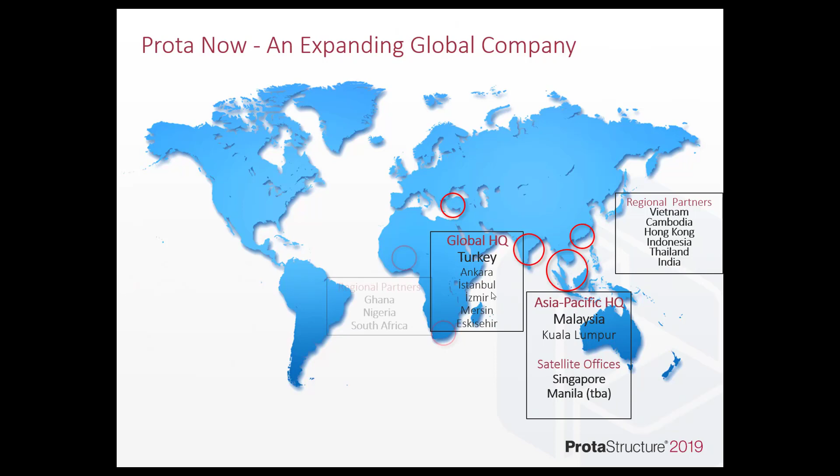In this region, we have regional partners in Vietnam, Cambodia, Hong Kong, Indonesia, Thailand, and India. We also have regional partners in Ghana, Nigeria, and South Africa. Our Europe office is located in Warsaw, Poland, and we have regional partners in Romania, Bulgaria, and Croatia. Finally, we have regional partners in Brazil and satellite offices in Russia and Middle East.

Well, today we'll cover some of the great features of ProtaDetails, namely detailed drawing generation of ProtaStructure models, retaining wall design and detailing, pile design and detailing, engineering utilities, parametric rebar generation, and we'll talk about the advantages of ProtaDetails. Okay, let's see it in action.

Well, we'll talk about ProtaDetails, but what is ProtaDetails? Well, ProtaDetails is not just one thing actually. It's more like a combination of engineering and detailing tools developed on top of a CAD infrastructure. So first, it's actually a CAD software in the core, but it also allows you to create and organize all structural concrete detail drawings in one go. Still, the definition would not be complete as it is equipped with design and detailing macros along with an intelligent parametric rebar generation system. We will go over these features as much as possible in this webinar.

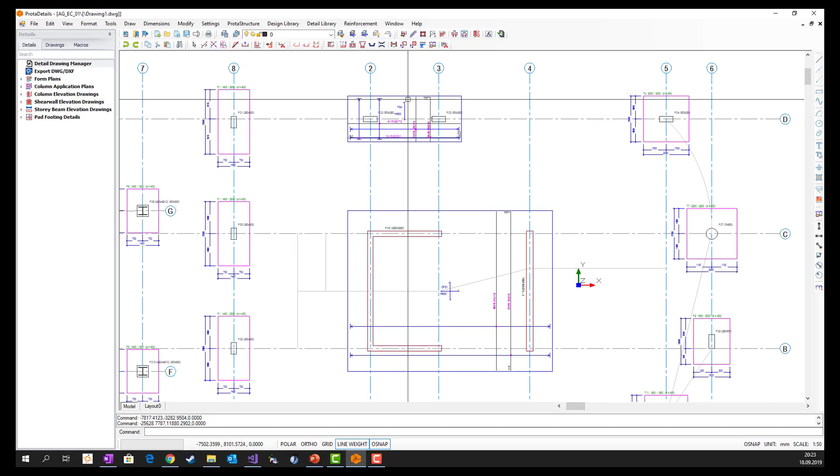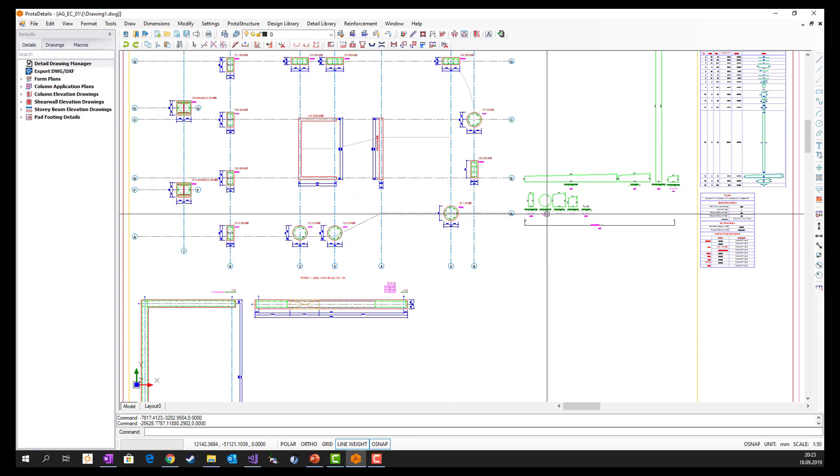Let's take a closer look at what we have produced. I have my foundation story key plans, my first story. They are all generated very neatly on my sheet. I have the column applications. I have shear wall elevations. I have column and shear wall schedules.

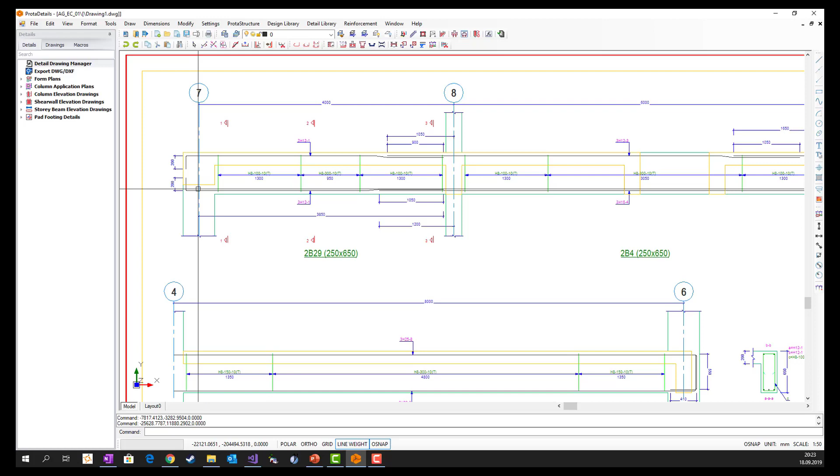I have my beam elevations. See, there is no clashing at all. It's a very clean drawing. And I have my footing details. Well, let's see what we can do more with our drawings.

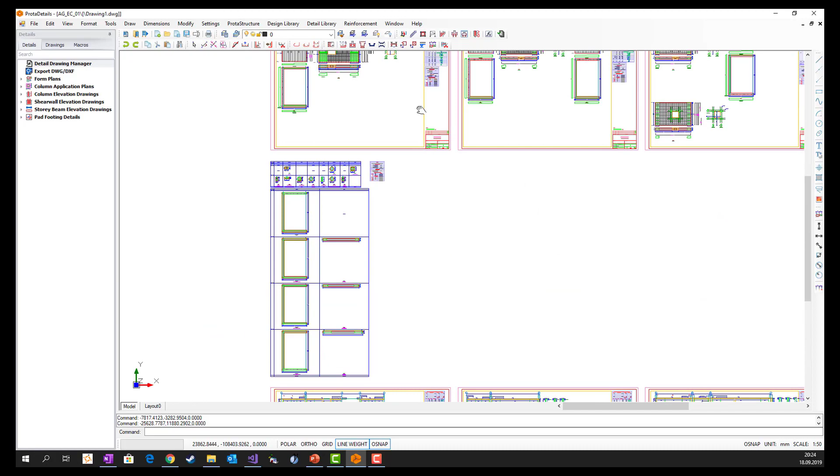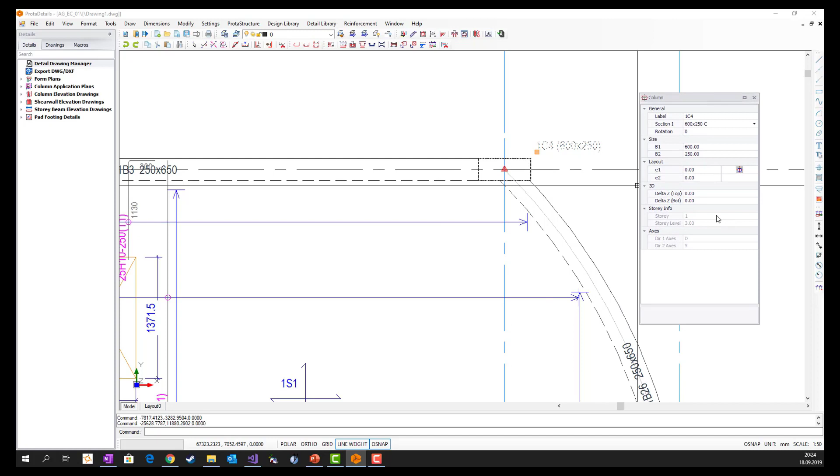As I told you, these are intelligent drawings. So what do we mean by this? It means that if I select a column, it knows that it's a column and it behaves accordingly. I mean, you can change its properties with the property window. You can change its sections, its eccentricities, etc. And it applies for all the members in this drawing, like beams and slabs and even rebars. Actually, rebars are the most powerful part of the software.

Well, I would like to do more with my drawings, of course. For example, I can cut a section along my form plan. For this purpose, I can go to Detail Library. I will go there and select Plan Section, and I will just pick 2 points on the screen. I will use Ortho Mode, and my floor section is ready.

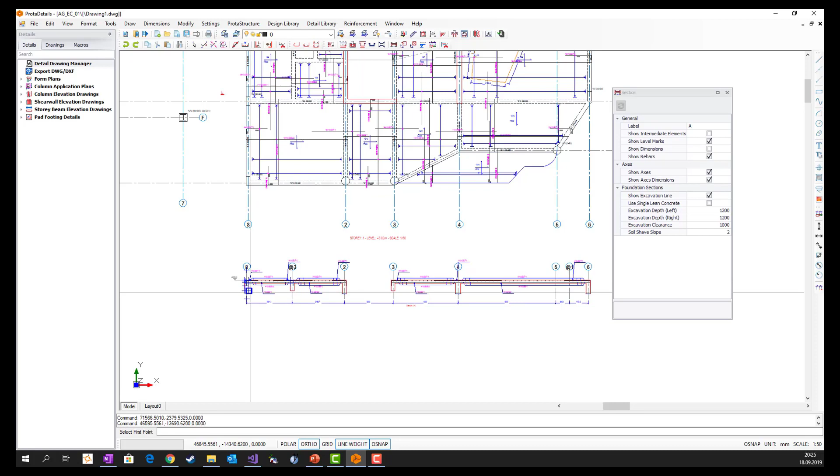I can change how it looks. It's ready with slab rebar sections. But as I said before, this is a CAD environment. That means that you can draw primitive CAD entities like lines, and it also supports command line. So I can draw lines, I can close them, snap. I can select all my snap options, and I can do a lot more with my primitive objects here.

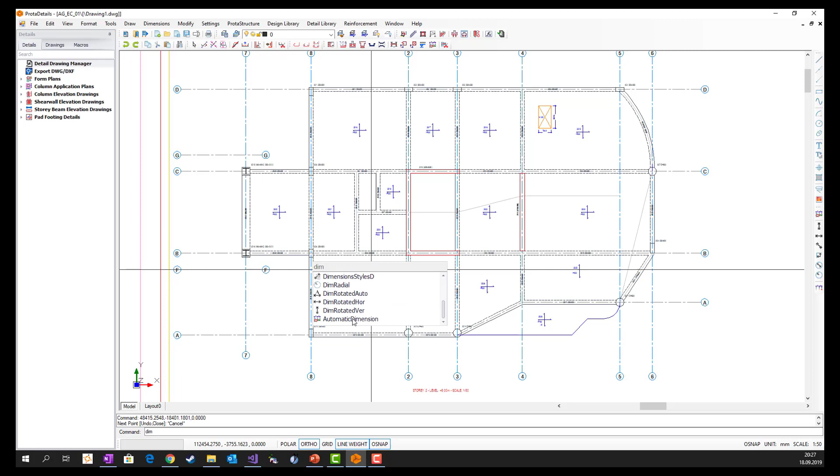Now let's go to the other story, and maybe you would like to dimension your form plans. Of course, you can do it with the standard dimension commands. They are all provided, but if you would like to make it faster, then you can use the automatic dimension. I just select the command and pick 2 points, just like I did with the form plan section. I don't want axis. This is an inner dimension, so I don't want any total dimensions. And yeah, that's about it. I will click OK, and my inner dimensions are ready.

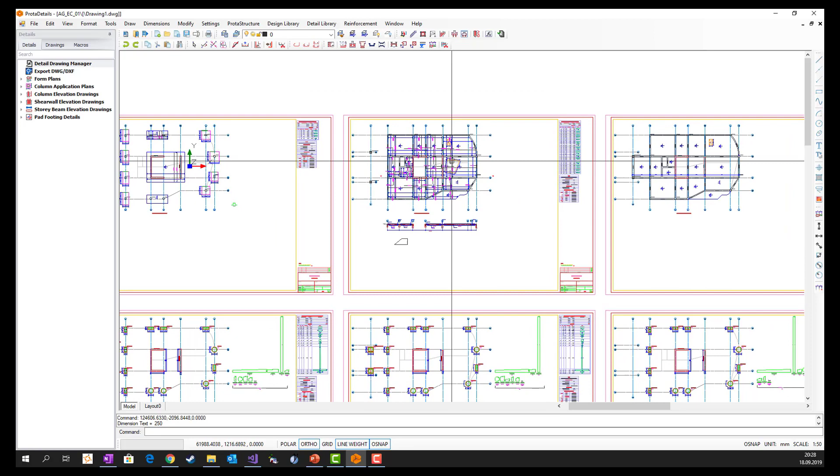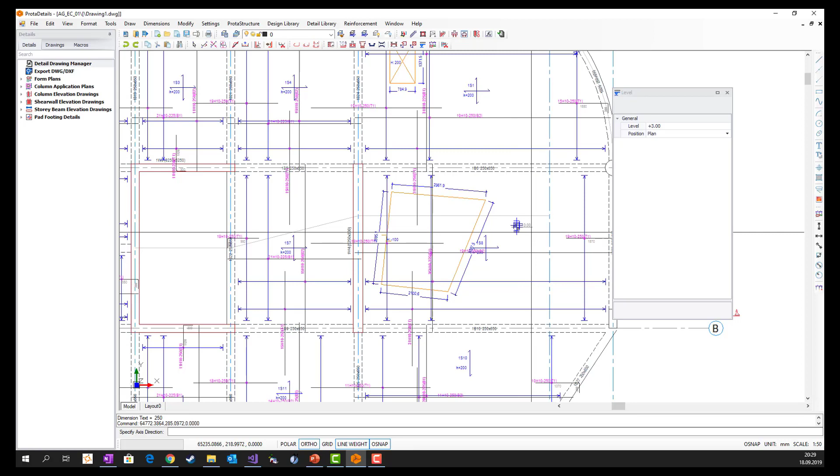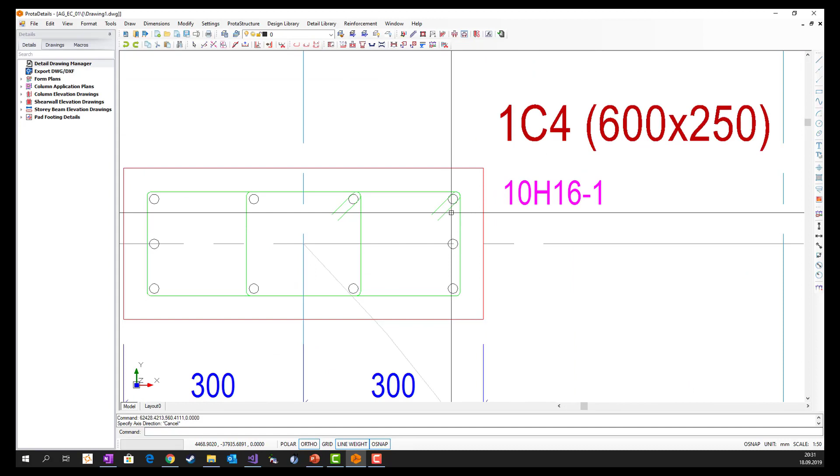So let's continue with column elevations and shear wall elevations. As I said, this is an intelligent drawing, so our rebars are intelligent as well. So when I click a rebar, I can change any parameters of a rebar here.

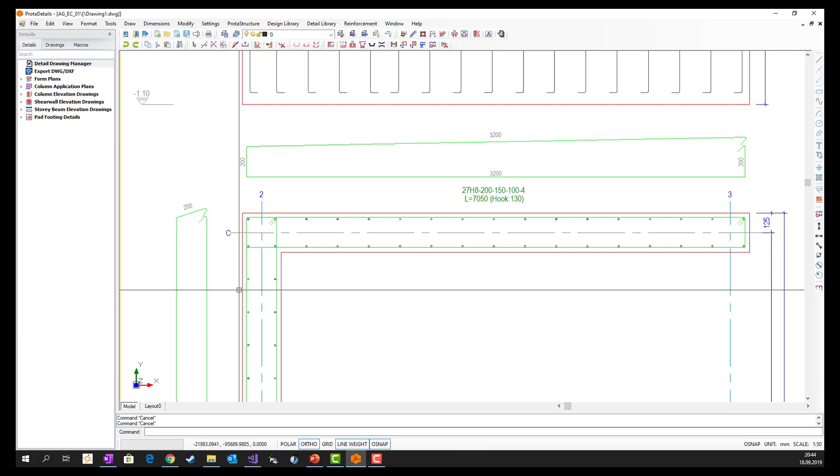I would like to go over the shear wall and column elevations. The level of detail has been enhanced significantly in column and shear wall elevations. Core wall details are generated with high precision, so you don't need to edit them manually. And this will save you a lot of time. Shear wall holes are displayed in elevations, sections, and schedules, along with the required rebars. So you don't need to worry about the code compliant hole detailing because it's all done automatically by ProtaDetails.

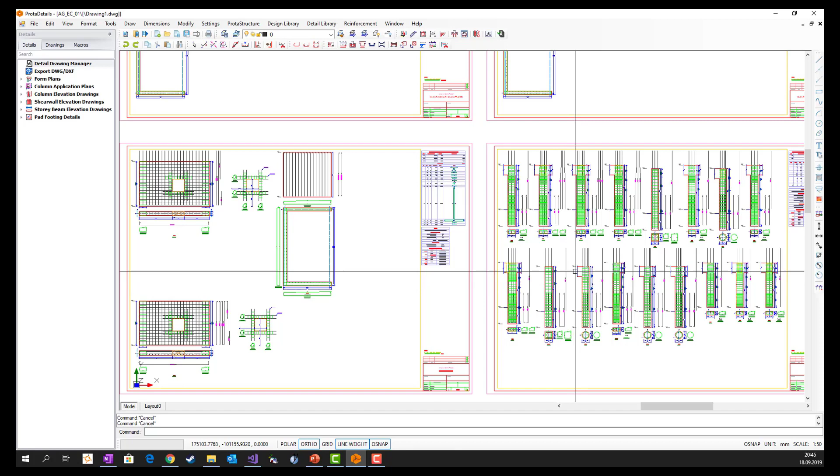Let's switch to column elevations. Well, in column elevations, longitudinal bars can be lapped in the mid-span of the column with this version. I have not preferred it in this project, but you can create mid-span lapped rebars in the columns. Slanting columns can be detailed precisely. Beams connected to columns from other directions can be displayed on the elevation as well.

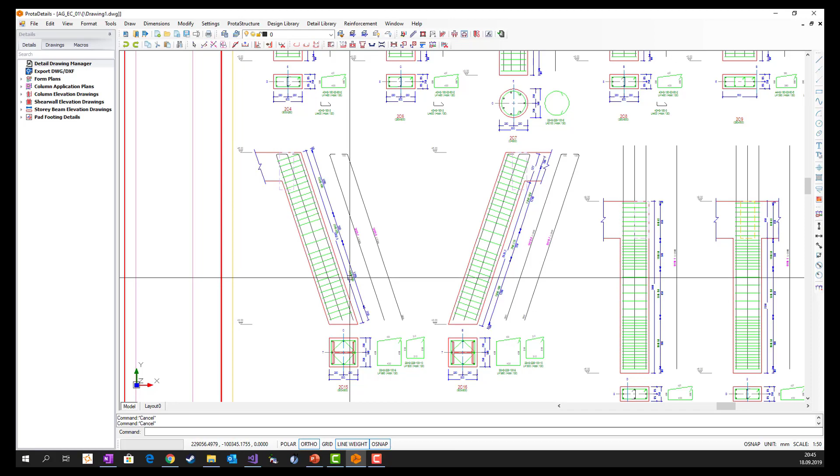But we know that the elevation story by story is not always enough. So it is usually better to see how the column is detailed through the stories. How are the rebars doing while the column section changes? You can prepare your column elevations through stories. Let's select this one, and I just right click and draw column elevation through stories. I want them to be drawn through all stories. So I see that the dimension is changing and my column elevation detail has been prepared according to the code provisions for the changing dimensions.

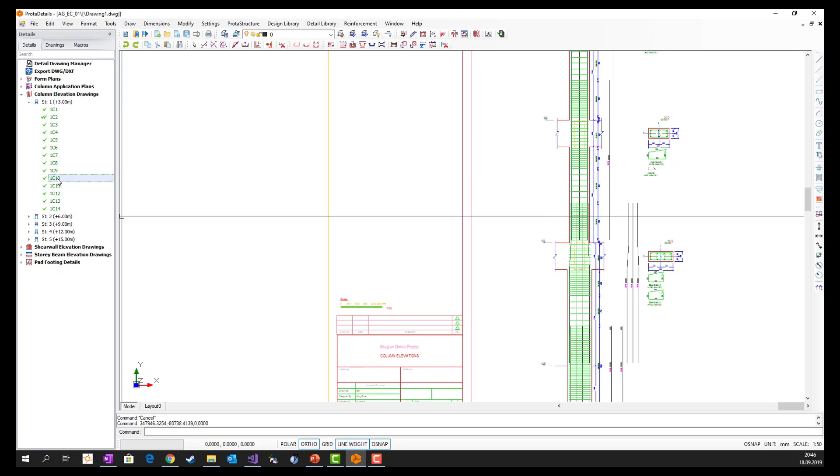Or maybe I have the slanting columns here. I would like to show them through stories as well. And you can see that they are detailed precisely.

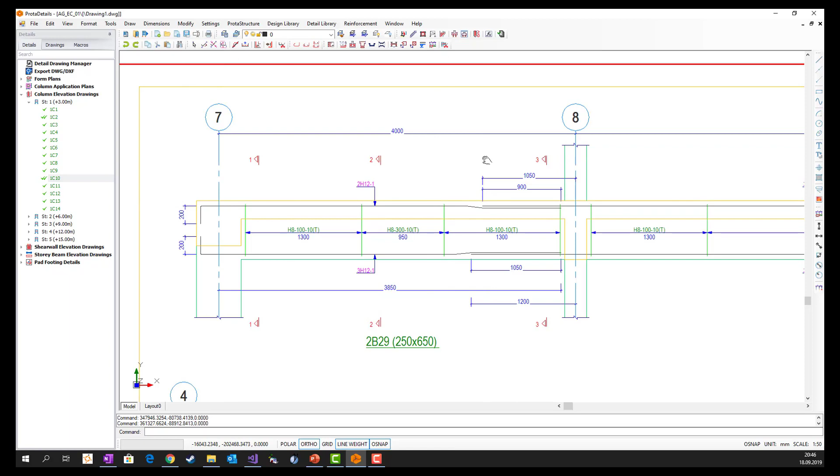Now let's see what we have produced as beam elevations. I prefer to truncate my beam elevations from the closest axis, so they look very neat inside the sheet. I could have truncated them from the sheet border as well. You see, this is a very clean, detailed drawing. And I would like to show another feature here, which is the intelligent rebar update. For each sheet, we create the quantity takeoff. And let's see, for this one, the amount is this much.

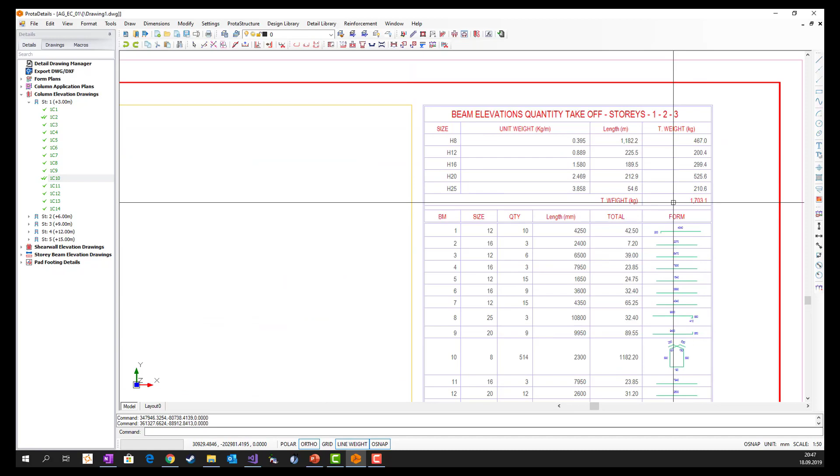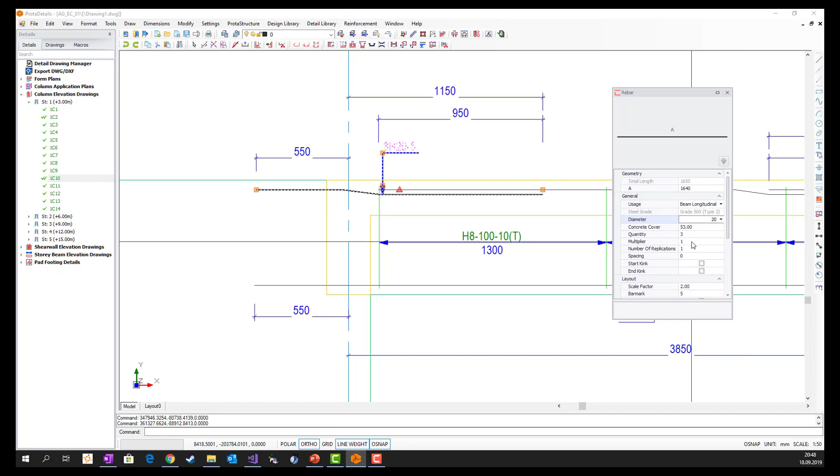But what if I had to revise my project and I had to change some of the rebars in some beams? Let's say, for example, this one. Let's say this rebar had to change the mesh diameter from 12 to 20. I have already created all my detailed drawings and still I had to do the revision, but I have a very minor revision. I don't want to draw all the drawings again. They're all ready. So I just come here and use the intelligent rebar property, and I see that the quantity table updated automatically and dynamically. Can you imagine how much time this will save you?

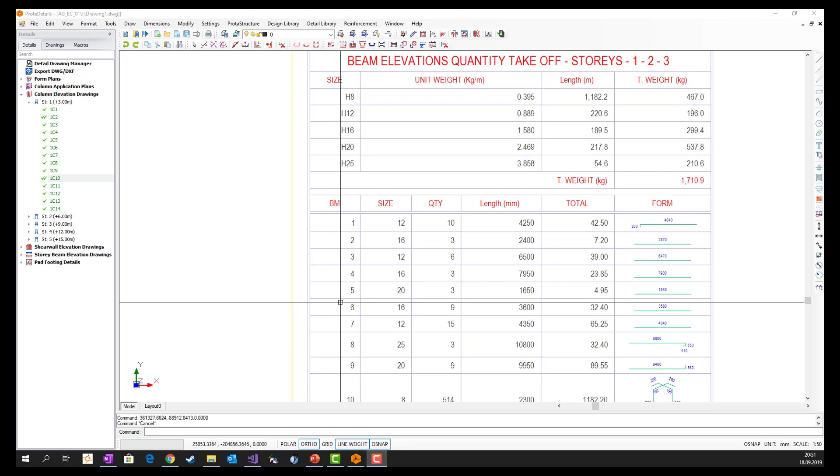Well, there are like 100 more functionalities about automated detail drawings, but I have to leave it here for now. And I will open a new drawing inside this project. ProtaDetails is an MDI application, so you can create as many drawings as you want, and you can save all of them along with your project. So I opened a clear page.

As I told before, ProtaDetails can do much more than just creating the detailed drawings of a building model. We know that you are not always dealing with buildings, but other types of structural components as well. We want to make your life easier. So we have a design and a detail library for that purpose. And we are continuously adding on top of them and enhancing the quality and the quantity of these libraries. I would like to cover a few examples here.

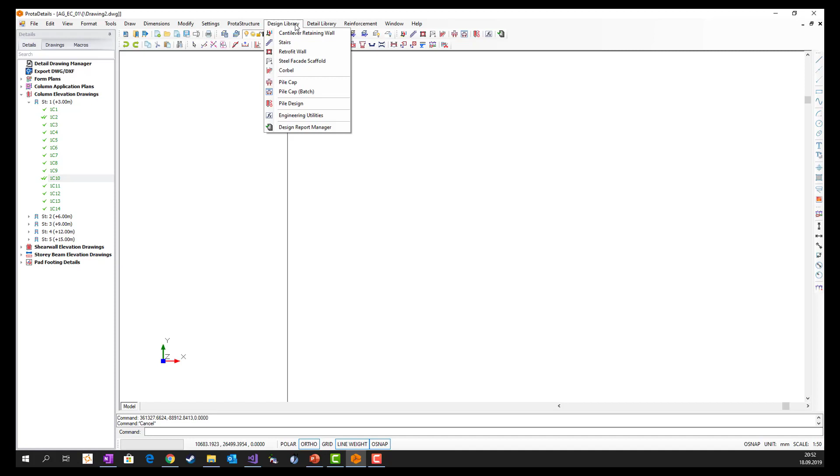I'm going to start with the cantilever retaining wall macro. We have made a lot of enhancements on our retaining wall macro with this version. I can confidently say that this is one of the most comprehensive solutions for retaining wall design and detailing in the market. You can load combinations, ultimate limit states, and partial safety factors. Detailing requirements are taken into consideration automatically here.

Let's say I have a shelf, maybe. When I click on the shelf button, I can see a guideline here for an economical design for the shelf. I can enter the parameters, soil parameters, front, back and ground soils. Well, this is a very cool feature. I can change the number of top rebar layers at the base plate, so I can have a more economical design.

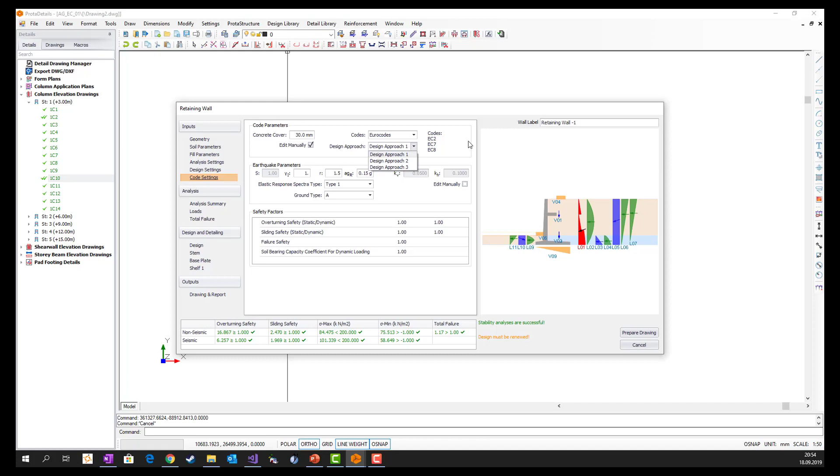I can design my retaining wall according to Eurocodes or the American codes. And as you know, Eurocodes offer a lot of different design approaches, and all of them are supported here. And the analysis is very transparent. So we show all the intermediate steps to you, so you can dig in further. The calculated loads are automatically generated, and you can see them on the right-hand side screen.

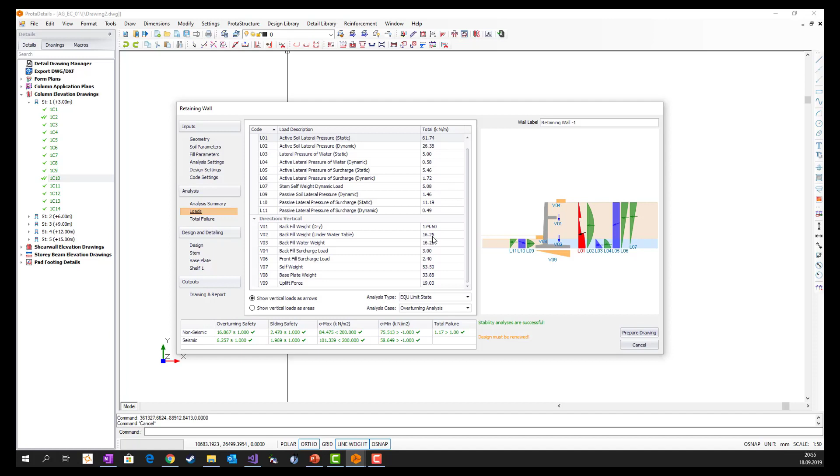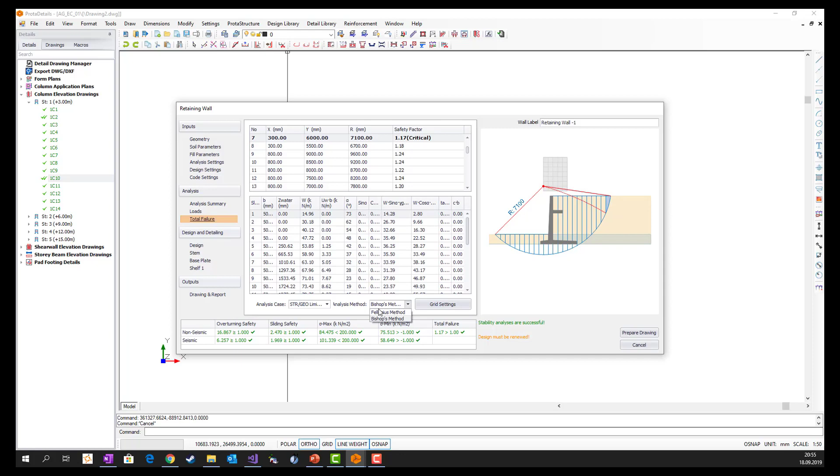I can investigate the geotechnical limit states, the equilibrium limit states, etc. for all types of analysis. And for overall failure, there are two different methods in the literature, namely Bishop's method and Fellenius method. Both are provided. So when I switch to the design part, my rebars are automatically selected here as well.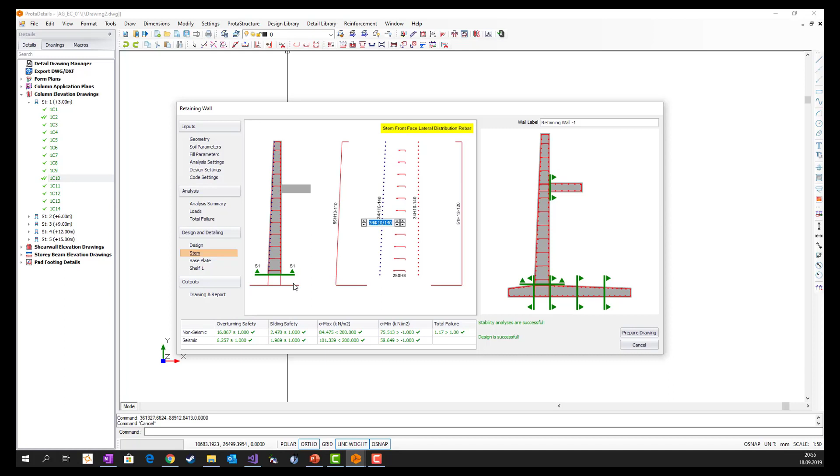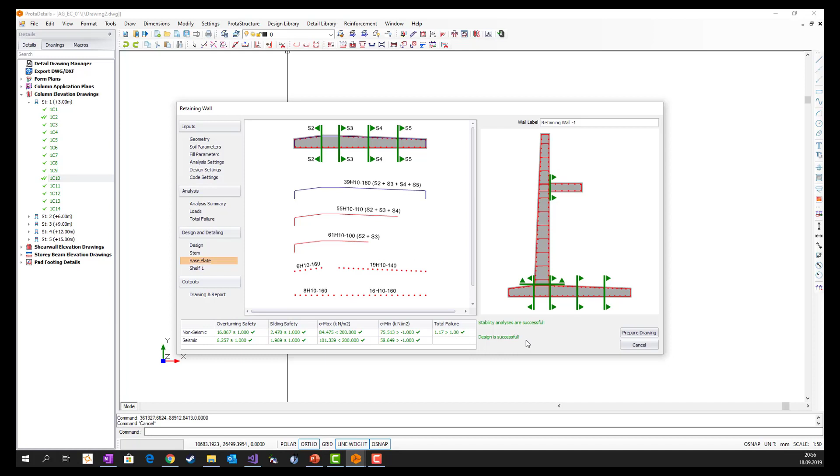I can see the detailed analysis of the sections, and I actually have a visual design aid here. So just like we do in our beam design module, I can come here and change the rebar diameters and other properties of the rebars. And the design is based on the most critical sections. As in the beginning, I have selected 3 different rebar layers for the top rebar of the base plate. So I can select them here and change. As long as I have the green design is successful text here, I am done.

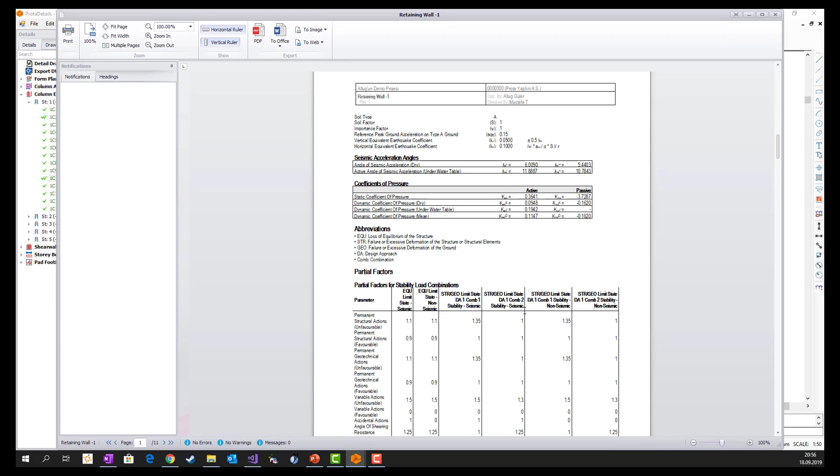What's left is I can create the reports for this retaining wall design. So when I create this report, it's a visually satisfying, very neat and clean report. And when I created this report, it's added at the back of this ProtaStructure model. So I will click Prepare Drawing and show an insertion point on the screen, and my detail is ready.

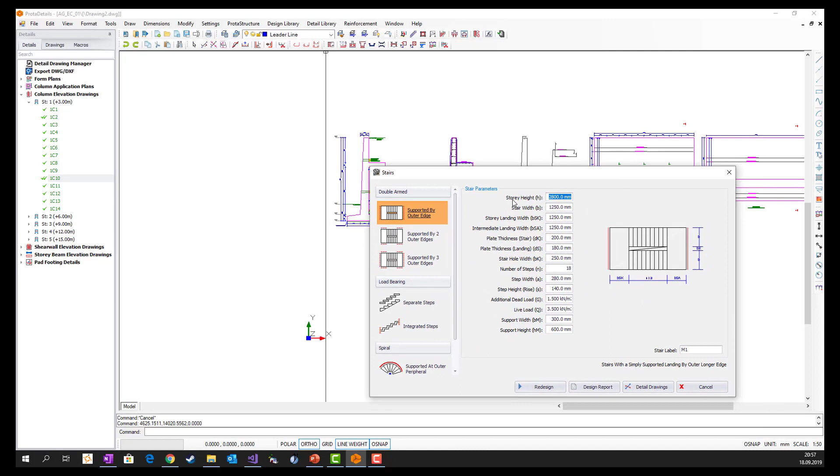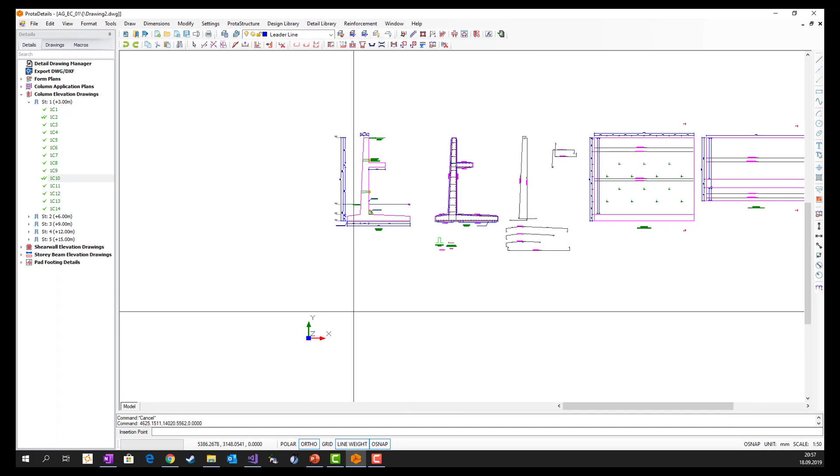Let's continue with another design macro. In my model, I could have stairs modeled in my structure, but if I want to detail them and design them, I can use this macro. I will just go with the default parameters. My design and rebar calculation results are shown. I can edit them. And again, I can create the design report, and it's done. Then I will just pick a point on the screen to create the details. It's complete with the quantity takeoff.

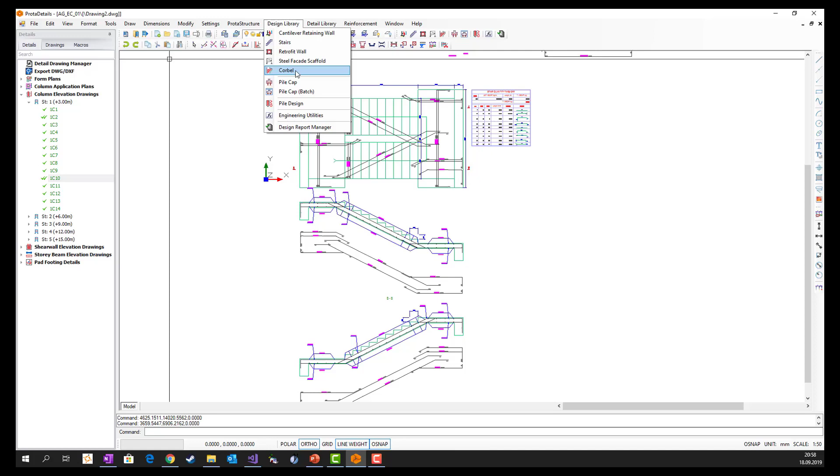I have retrofit wall macro, steel facade scaffold macro, and corbel macro. You can design your corbels using this. Maybe I have a double cantilever corbel with tapered shape. I enter my loads, and okay, I'll go with the Eurocodes, and I will just say draw. The design is successful already, so I will just say draw and pick a point again.

What else do we have? We have the pile cap macro. The pile cap macro is the same one that you use in ProtaStructure.

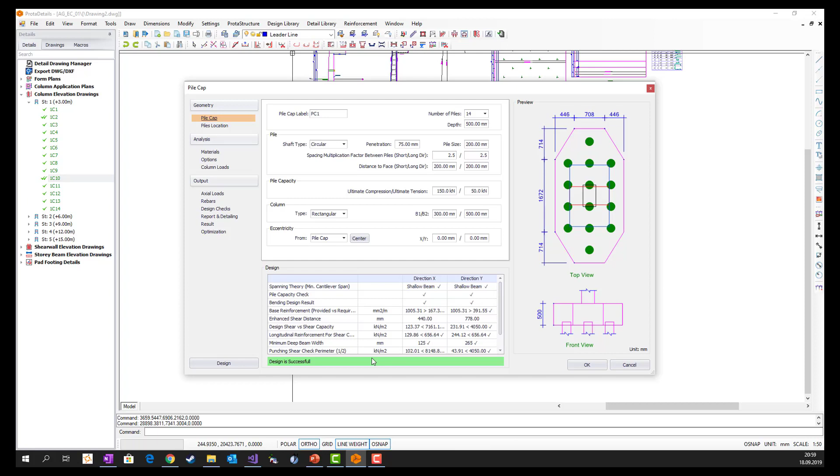I can change the number of piles, and I'm always updated, and I can follow my design status here. As long as it's green, it's successful, I'm all clear to complete my design. I can enter my column loads, change my column loads here. I can select or override my rebars, and I can even optimize my design. When I'm done, I click OK and pick another insertion point.

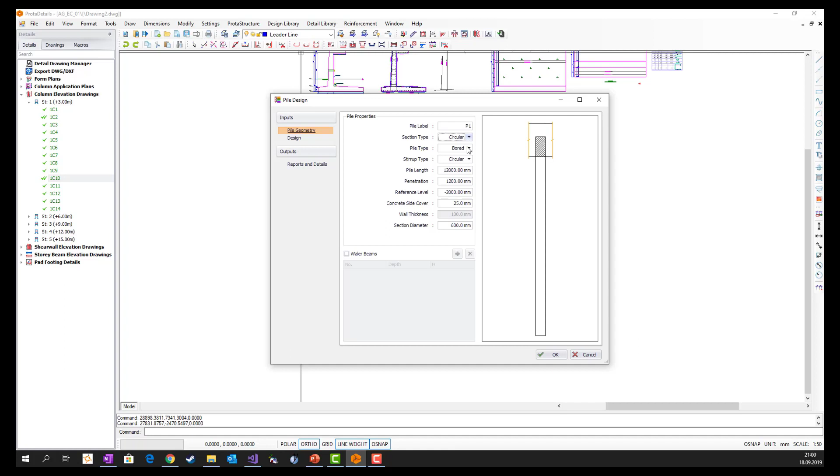The next macro I would like to cover is pile design. It's a very useful macro. You can design individual piles with different section types or pile types, bored and pre-stressed spun, and maybe you have some Waler beams over here.

When I switch to the design tab, actually I don't need to design this pile, I just go with the detailing part of it. If I say OK and show the insertion point on the screen, it's just about detailing. But if I want to design it, I can design it to working load or lateral analysis.

When I click working load, I have more tabs opened up. I provide the axial force value. When I switch to soil profile, I enter the soil profile that I got from the geotechnical report. I can change the soil materials here, define new soil materials, and use them.

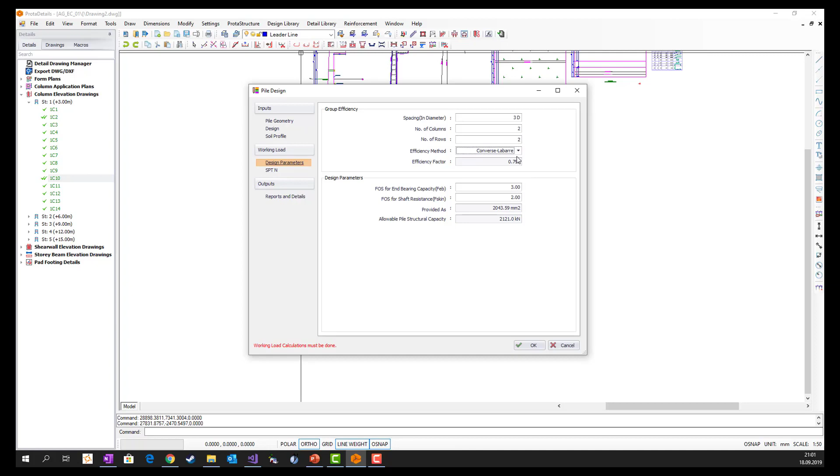And there is of course the efficiency method. You can select from 3 of the efficiency methods in the literature. Provide the standard penetration test results here, and maybe I have some negative skin frictions, and I just say calculate working loads. When I click the button, the diagrams come up and my working load is calculated.

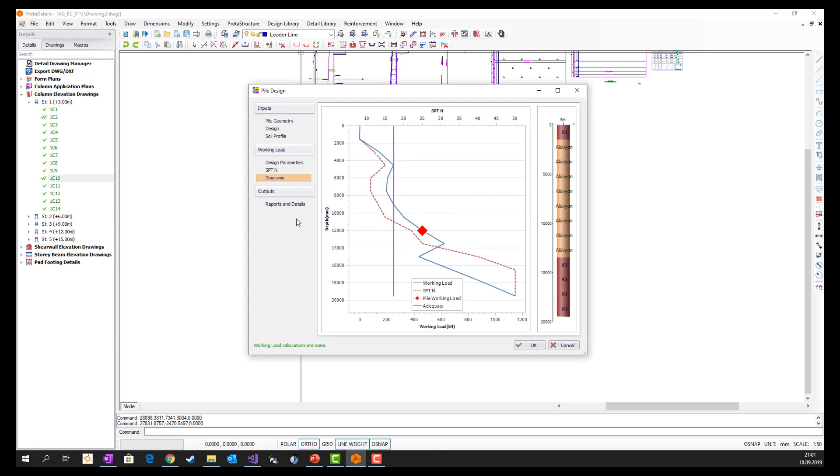But what if I want to perform a lateral analysis as well? I click this and I have to provide more information now, like shear forces and moments in both directions. And I have another window here - this time I have to provide a soil model as well.

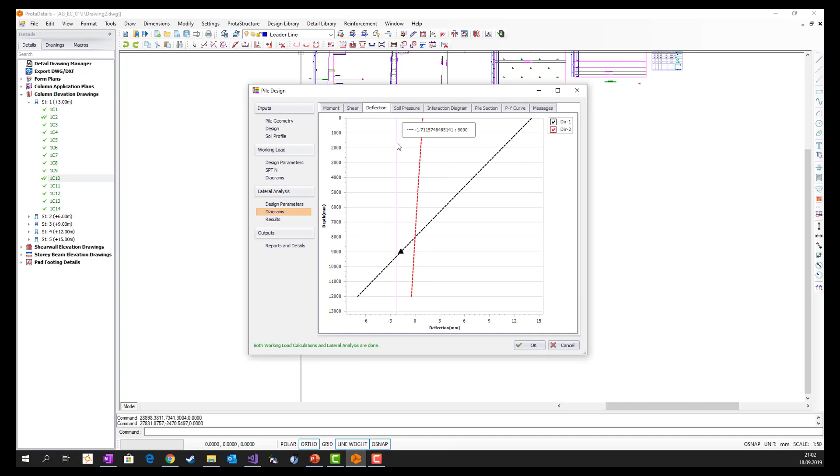I select from the existing soil models and use the recommended values, then click design pile section, and my design is ready - the diagrams are generated. I can inspect the moment, shear, deflection, soil pressures, interaction diagram, and so on, and check the results here. Again, I can create my report, and when I'm done, I just click OK and pick an insertion point on the screen.

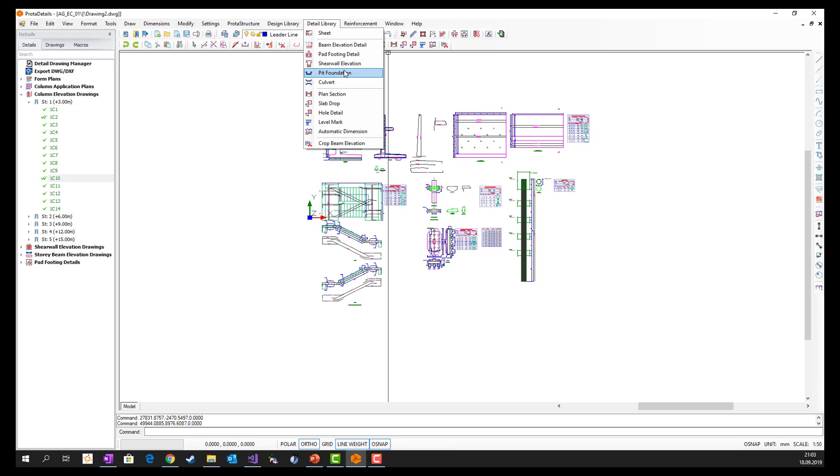The difference between design libraries and detail libraries is that under design libraries we provide both design and detailing of components, but under the detail libraries you can find components that you can only detail. Under detail library we have pad footing details as an individual component detailing.

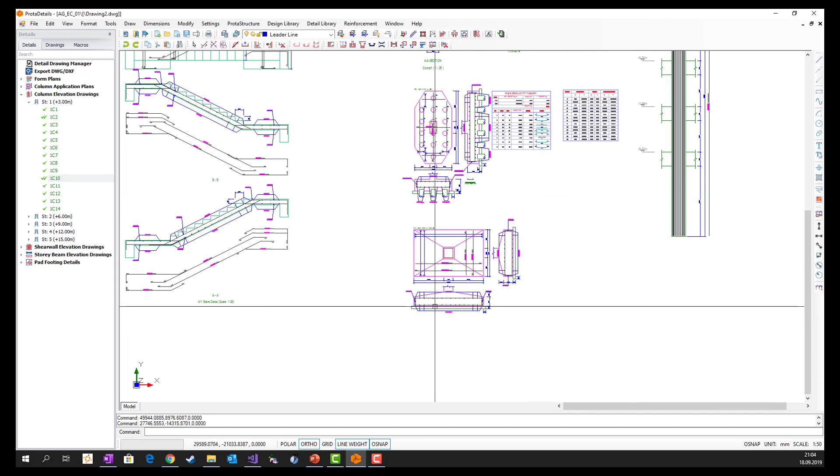I can detail my pad footing. I can select from different rebar detailing options here, and I just click OK, and again my drawing detail is ready with more rebar placement options here.

And what else do we have? We have the pit foundation detail library here. I can use this one - I provide all the values and just click OK.

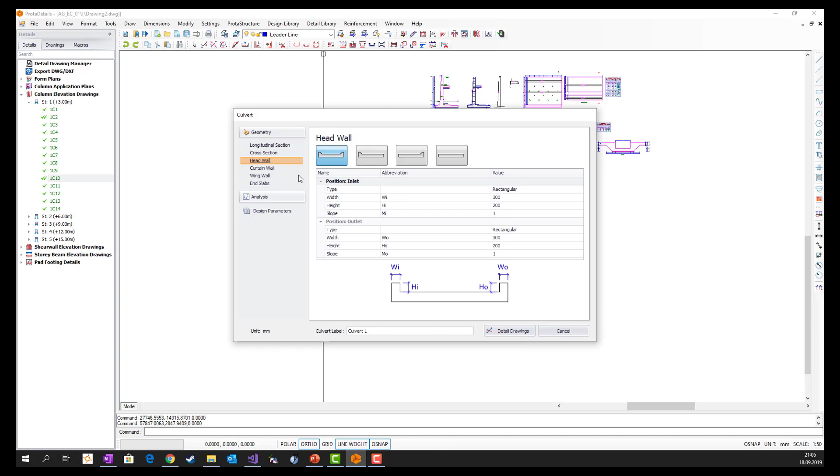We have a very comprehensive culvert macro. You can provide the longitudinal and cross sections with very flexible options here. You can change your head wall style, curtain wall style, wing wall type, and play with your end slabs, and when you're done you can just click and generate the detail drawings.

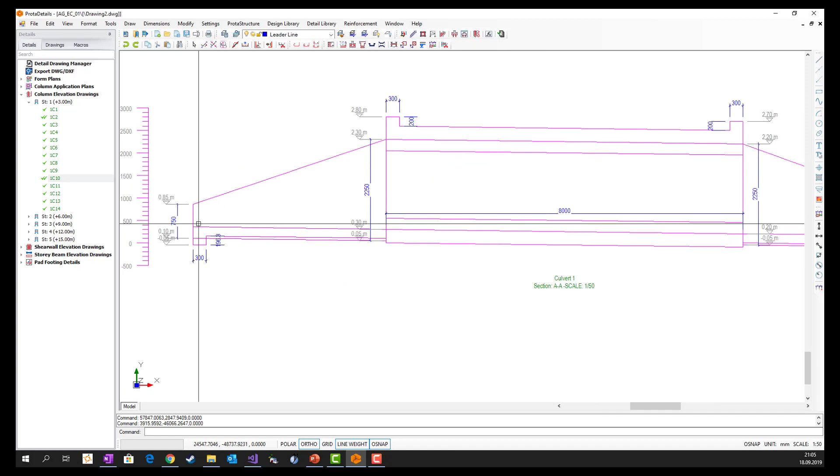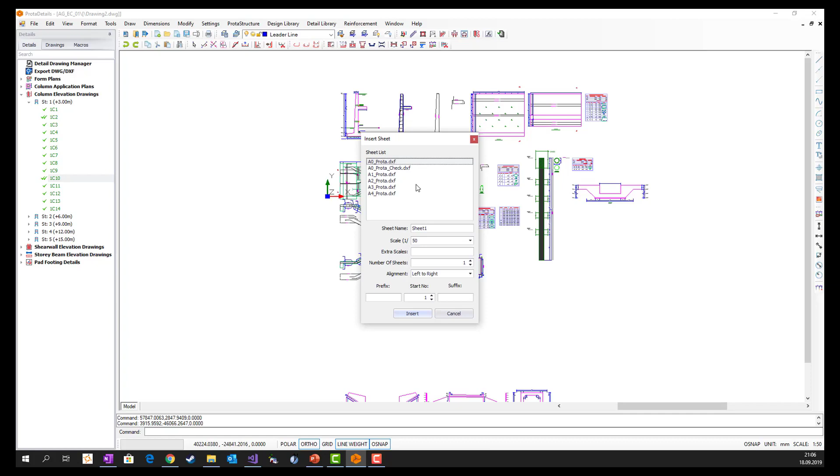My longitudinal sections and cross sections are already here. I have created many detailed drawings, but they are lying all around the arena. I just type sheets, and you can select your sheets among your company standard sheets that you have created. I will just click OK, insert, and let's insert it first here.

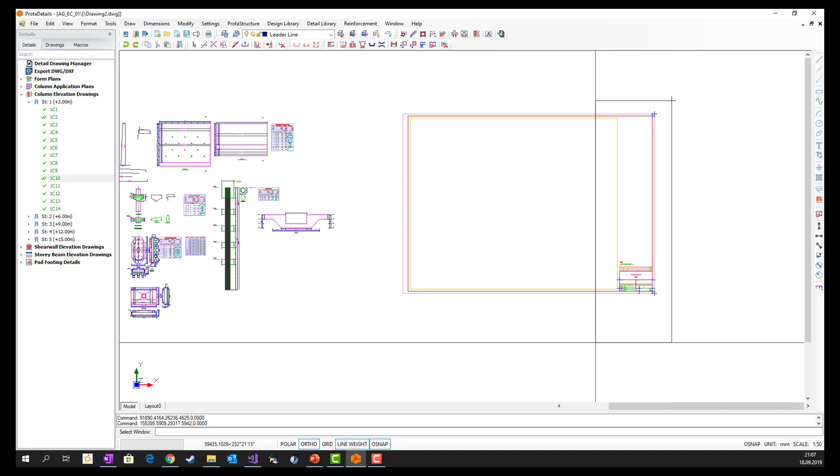This sheet won't be long enough for this many details, so I would like to stretch them a little bit. As I said, this is a CAD arena, so I will just type S, and the stretch command appears from the command suggestion. I select it and stretch my sheet just like that. I think this is better now - that's enough. And I can, of course, move my sheet.

If I make some more arrangements, it will look better. As you see, I can play with my detailed drawings just like I would in any other CAD software. I have created all these details, but what if I would like to quantify them together? They have individual quantity takeoffs, but let's say I want to produce them all together and have a single quantity takeoff.

I will use the most powerful feature of ProtaDetails for this purpose: the quantity takeoff. I will just type the quantity table and OK. By the way, all these commands are ready and available from the menu as well, but I just prefer to use the command line. I select the arena and click enter.

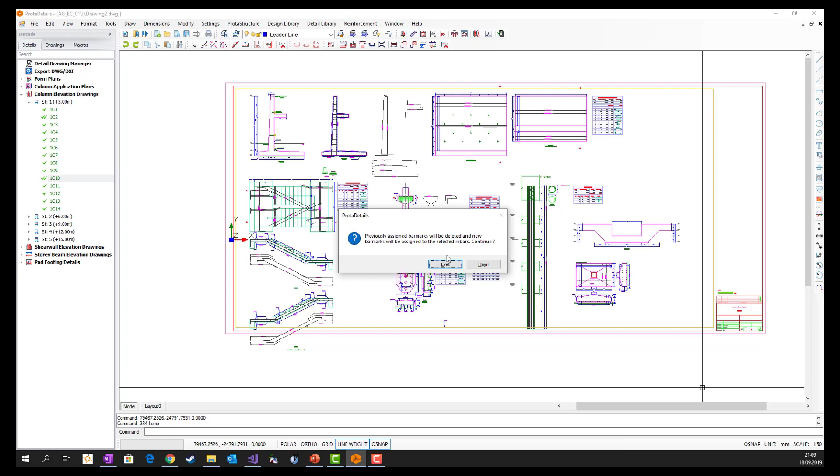Yes, I would like to create a new quantity table, and let's create it over here. You see all my rebars are now assigned with new bar marks, and all these bar marks are listed in this new quantity table.

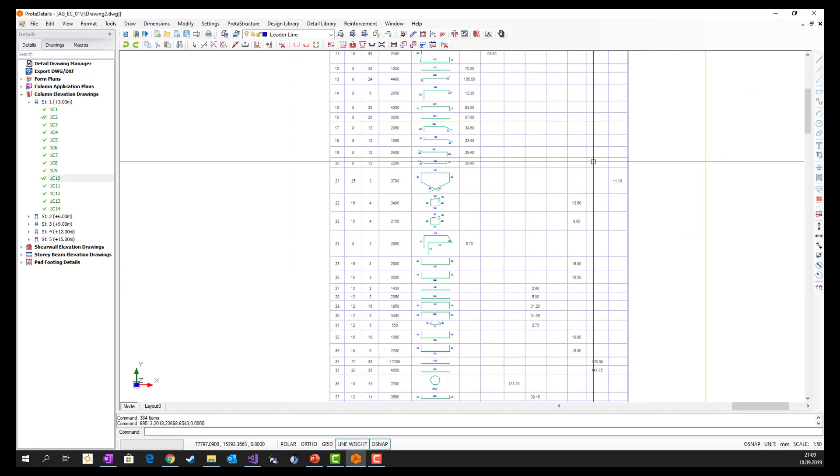So I can see the final result of this sheet's total sum. By the way, as I told, this is your sheet actually. But what if you would like to change some information on your sheet? These are parametric sheets, and you don't have to stick with what you entered at the beginning of your project. Maybe you want to change some of the features or information fields here. It's very easy to do.

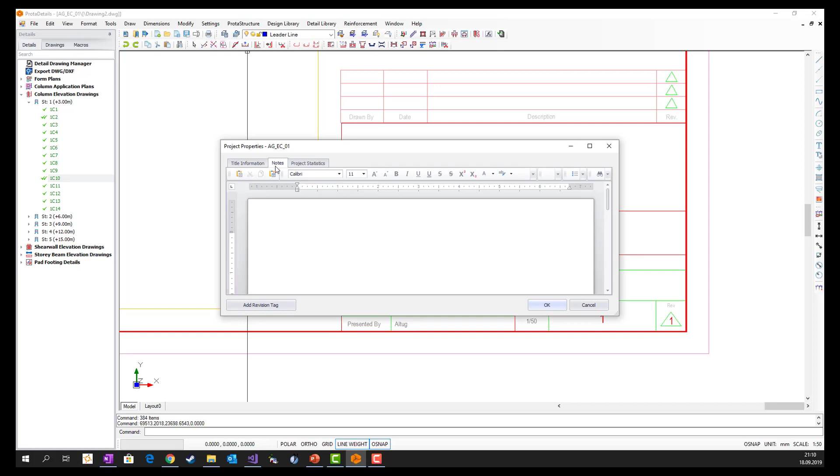I just go over to the ProtaStructure menu and click project header, and change, let's say, drawn by and presented by me, and this is my project. Maybe I can add some project number, or select the project date and revision, update the revision. I can take notes and see the project statistics as well on the screen, but I'm going to go with this, and I'll click OK.

The program knows that I have already placed some sheets on the arena, so it asks me if I want to update this. Yes, I would like to update these, and you see it's updated on the go. Remember that I have edited this sheet many times, stretched it and moved it inside the arena, but it's still alive and I can change any information on it.

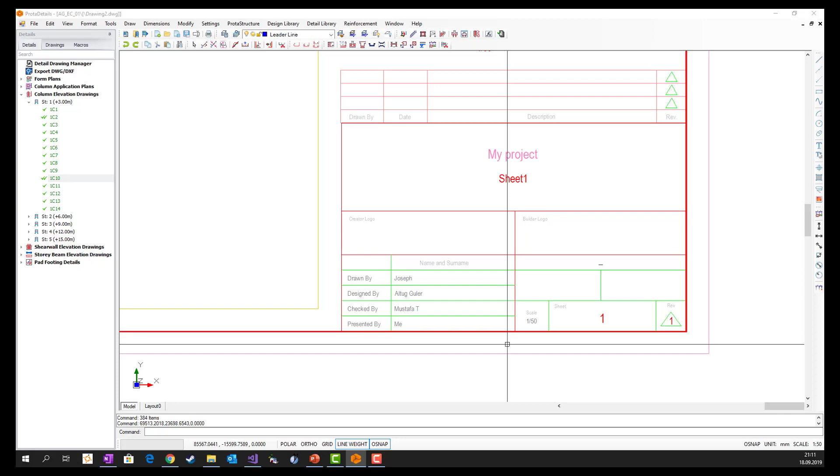Okay, let's leave these detailing and design libraries here, but I'd like to show one more library: the engineering utilities. As civil engineers, we need some basic but fundamental tools. They are the ones we have to use to achieve more complex tasks. We had this idea in mind while creating these engineering utilities.

For example, you can calculate cover and anchorages for different element types, for different concrete design codes, and for different exposure conditions. And it's all again alive for this.

If I change the diameters, I can see anchorage and lap lengths on the fly. Hook length, again similarly, I can select the link diameter and my hook bending length, extension length, and total hook length is calculated.

Rebar area calculator: let's say you have a span length of 2000 millimeters. When I enter the span length, the quantity is automatically calculated. Or alternatively, I can enter the required steel area, and again my quantity is recalculated, and provided steel area per meter is recalculated. If I change the selected rebar, my provided steel area per meter is again recalculated according to the parameters here.

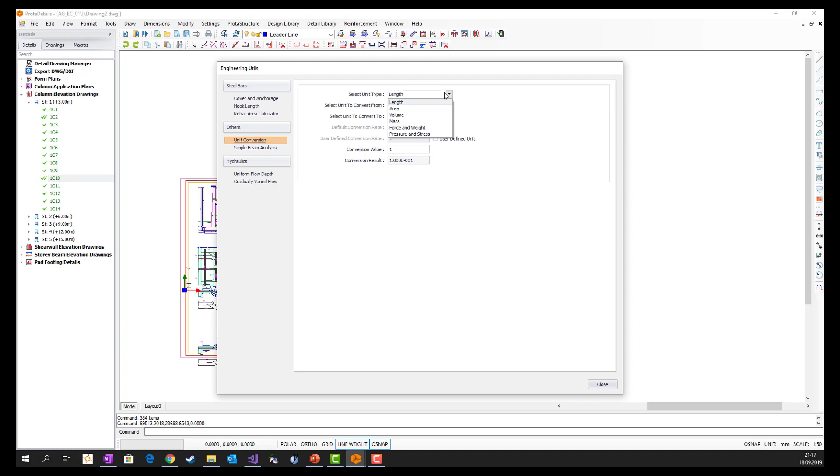You can even make a simple beam analysis here. Let's say I have a beam fixed at both ends, and I have a concentrated load or maybe a uniformly distributed load. I can change the load parameters, and the result, the end reactions, are automatically calculated along with the maximum deflection.

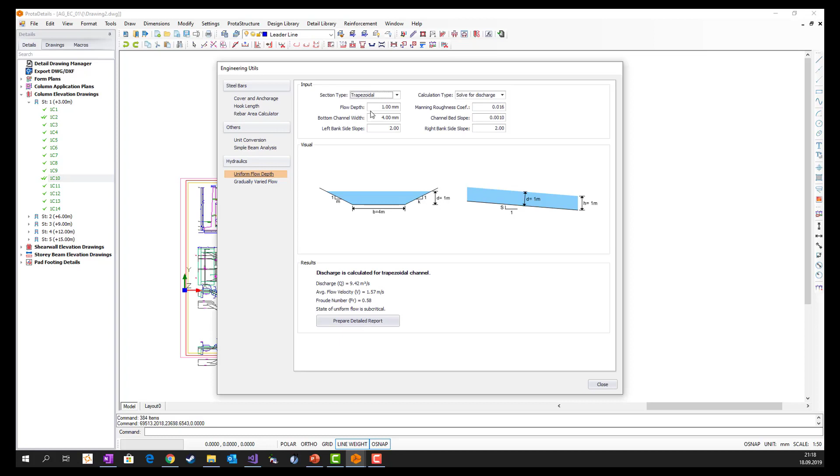We even have some hydraulics macros. I can find the uniform flow depth for different types of sections - trapezoidal, rectangular, circular - and solve it for discharge, flow depth, channel diameter, etc. I can even analyze gradually varied flow for, let's say again, a trapezoidal section type.

Well, I'd like to talk about some more life-saving features of ProtaDetails. We know that you have a lot of drawing files lying around without any sign of life. Those drawings are usually a bunch of DWG files with polylines and text representing rebars. You have to use Excel sheets and manual calculations to measure the quantity.

Let's open an example of these types of drawings. I have a drawing here with some primitive rebars. But as I said, you have to use Excel sheets and manual calculations to measure the quantity. The worst part comes when you have to revise these drawings, when you have to deal with changing bar marks, and a never-ending quantity update story starts.

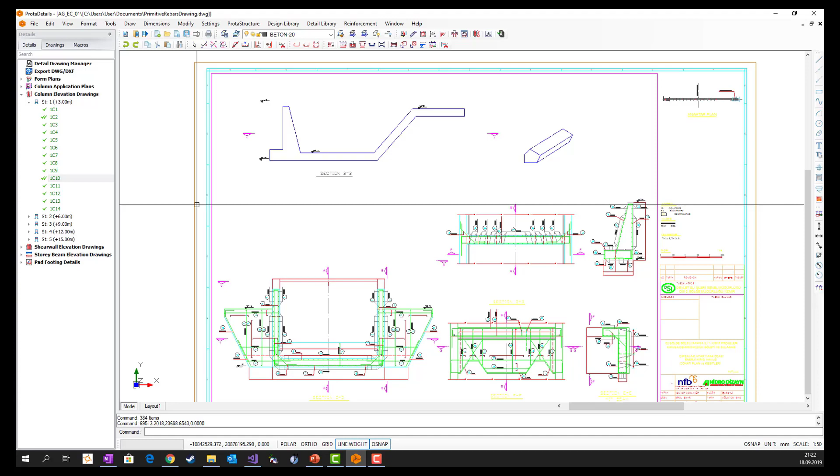Well, we have a solution for that. We have a detailed drawing over here with the rebars represented by text and polylines or lines. As you see, these are just simple primitive lines.

I would like to make use of the high-level features of ProtaDetails. So what I will do is click this button. I see that this is a 10H32 bar. I select the diameter here.

There are 10 of them, and the spacing is 200. What I will do is simply select this polyline entity, and it's automatically converted to an intelligent rebar with its length calculated. The polyline is gone, the bending is done. I can continue just like this. These are all 32 bars.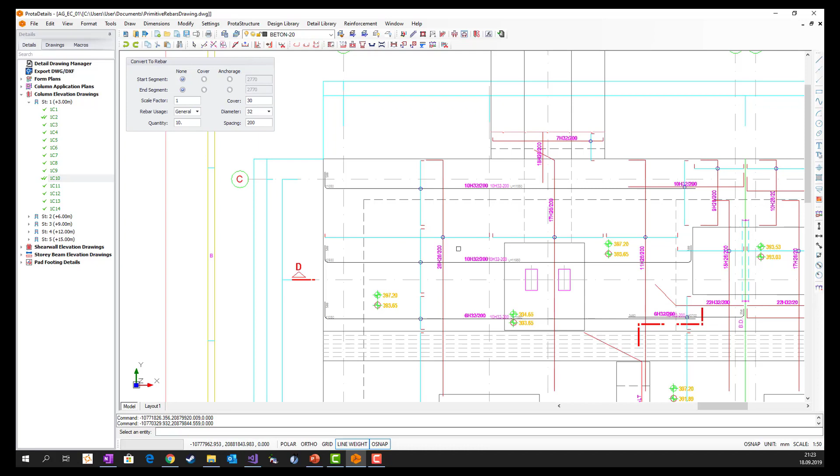This is it as well, and I have some 26 bars here, say 26. Okay, this is 26—oh, maybe the quantity number is different. Okay, I can continue this for all the drawing.

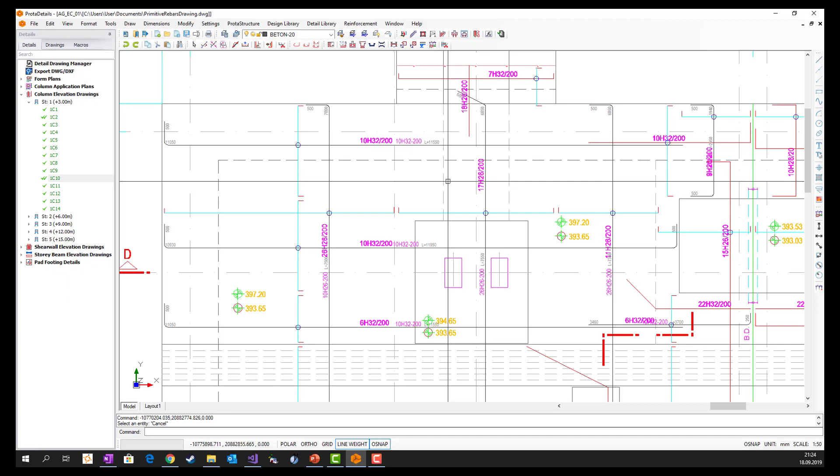And the best part is, of course, again we can quantify them. Just select this region and pick an insertion point for my quantity table. You see, they are all quantified. If I go back to my rebars, I can see that the bar marks are generated.

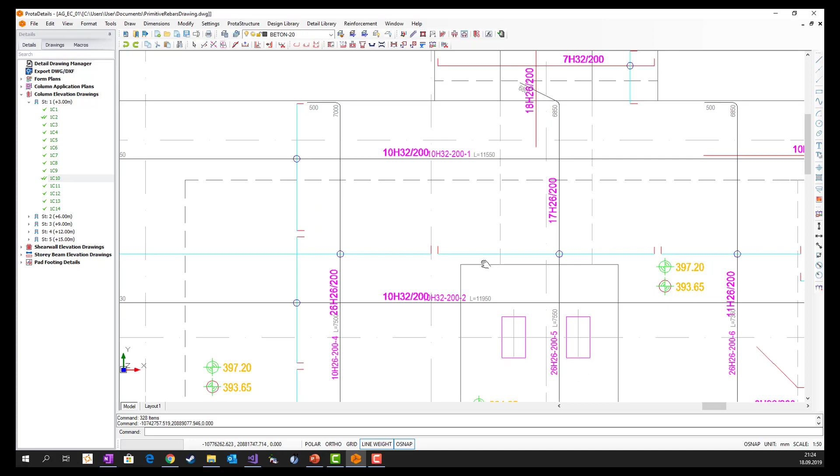What if I have some non-standard components that I would like to detail, but I already have ProtaDetails, so I can start with intelligent rebar detailing from the beginning. I click this button, and again I select the diameter here, say 16, and the quantity, of course.

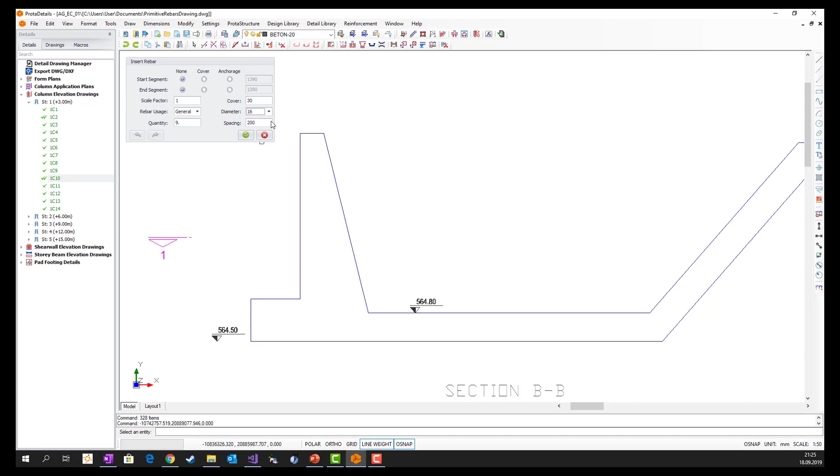I start selecting the line or polyline and selecting the side. I have started here, and I would like to have some cover over here, cover of 30 millimeters, and I continue. At the end, I would like to have an anchorage of, okay, 1000 millimeters. You see, it changes on the go.

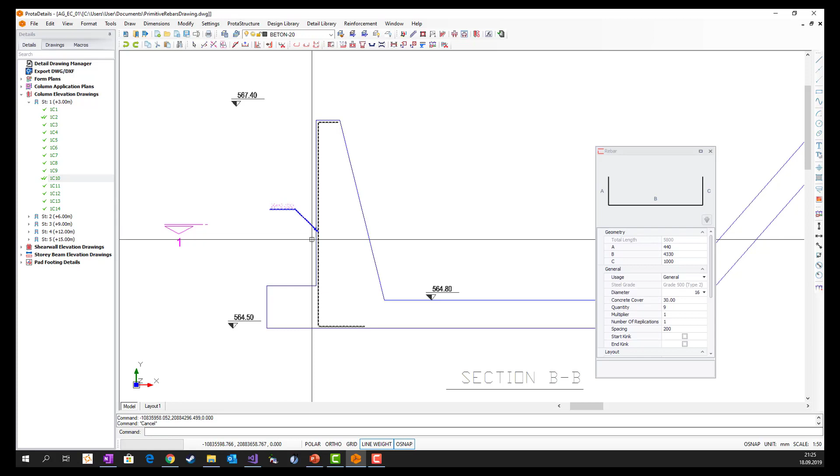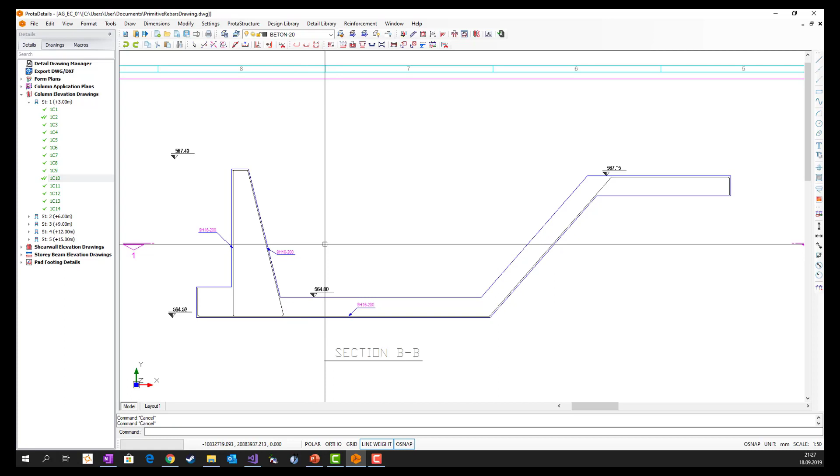When I'm done, I simply click OK, and the label is generated. I can place this label anywhere I would like, and I can continue with my detailing just like this. And this. When I'm done, I'm satisfied with my detailing. Of course, I can again finish the quantify, but first of all, okay, I forgot this one.

What if you want to create a link detail? You have a polyline, let's say. If you select it and right click it, you can convert it to a link or insert a link inside. I will just go with this one. I have created the link, and I can even create a 3D view for this link, and I can see how it looks actually.

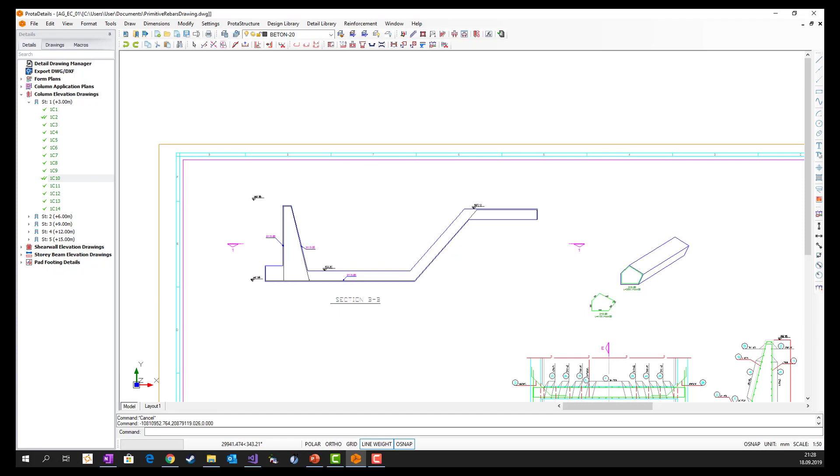So you can turn any type of polyline into rebars. You can place intelligent rebars in any type of polyline or line. So of course, when I'm done, again I will call the quantity table command. This time let's use the reinforcement menu, quantity table, and voila. Well, that's all I can cover in the course of this webinar.

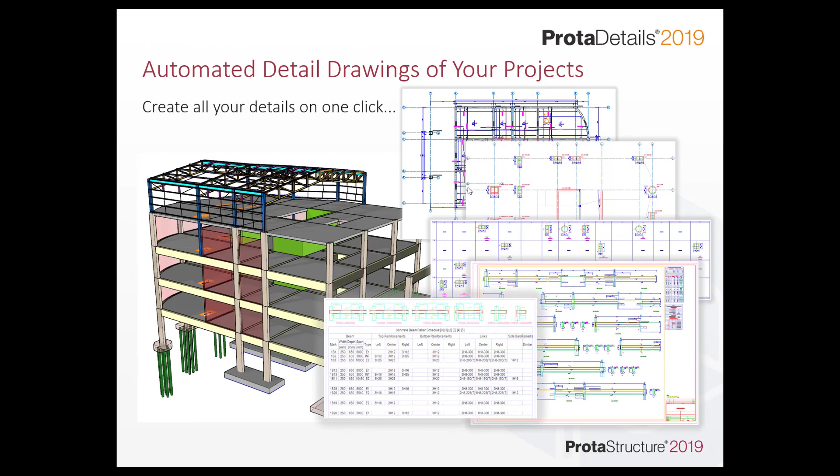Let me briefly go over what we have covered today about ProtaDetails in this webinar. Automatic detailed drawings of your projects—you can create all your details in one click: form plans, column elevations, column schedules, beam elevations, beam schedules, rebar beam bending schedules, footing details, and automated detail drawings of your projects can be enriched with some manual editing options like form plan cut sections with rebars.

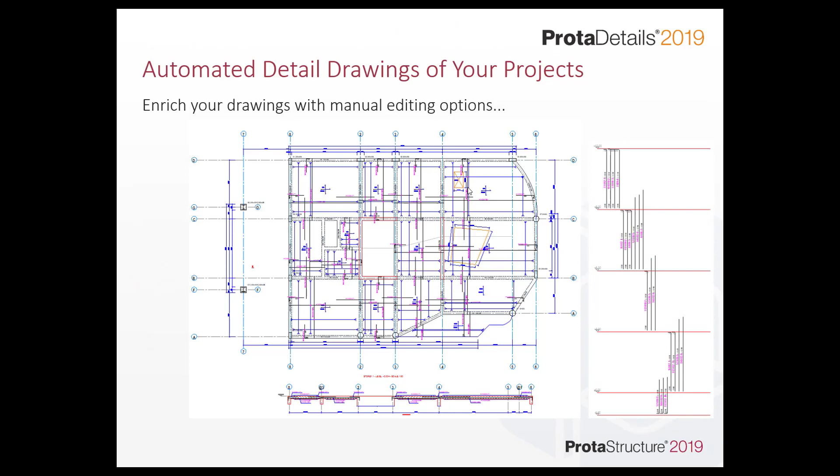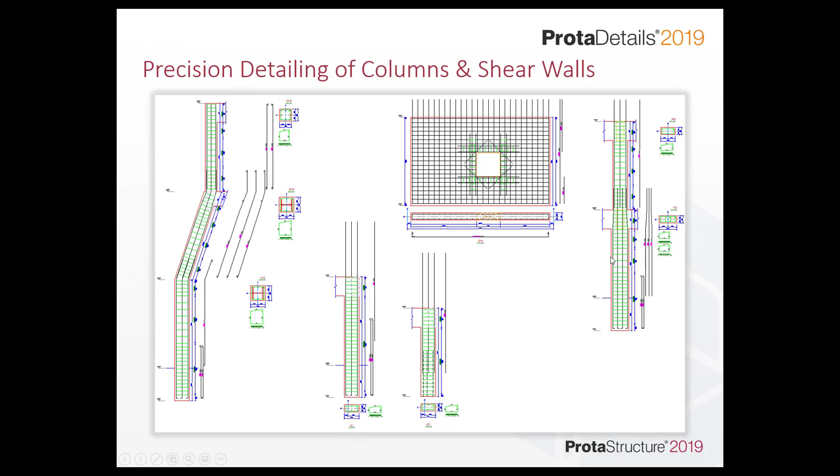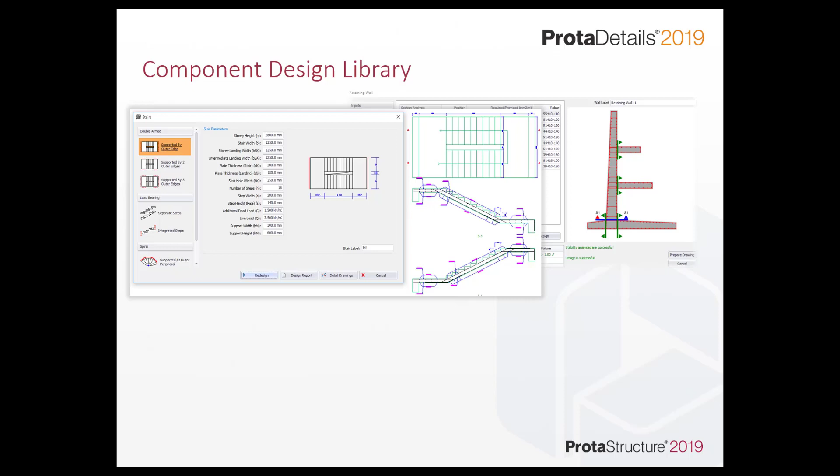In the component design library, we have a very comprehensive macro for cantilever retaining walls, stair design, corbel design, pile design and detailing, and we have these wonderful engineering utilities. Well, I haven't covered this one.

It will be coming with the next version of ProtaDetails. You will be able to produce beam elevations, design, and detailing independently from your ProtaStructure model. So you can create any beam sequence in 3D and design and detail them. This will be coming with the next version.

And we have covered footing detail, pit foundations, culverts. So ProtaDetails is a full-featured CAD tool with intelligent objects. You can create rebar objects intuitively, convert polylines to intelligent rebars, quantify all rebars, links, tie bars, and mesh steel with complete shape forms, and you can make use of undo and redo on any operation, of course.